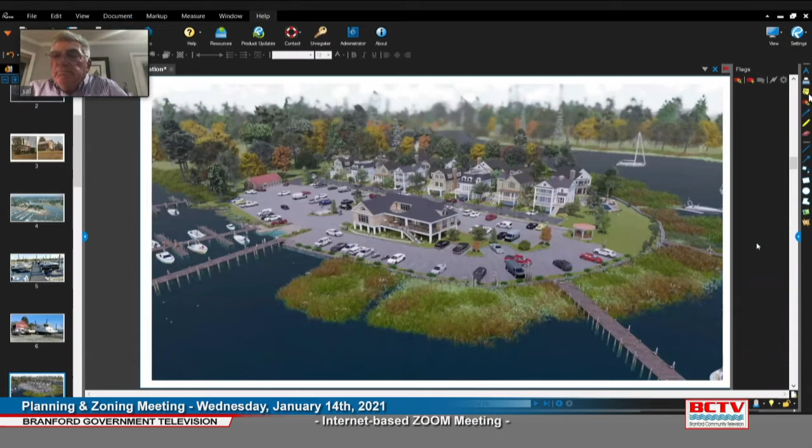And this is what we hope to do, the next phase of the project: Marina Village. There are 3 existing homes on the property now that, again, are in pretty rough shape. We hope to remove those homes and build 12 additional homes, plus that larger building you see in the middle of the parking lot.

The Sullivan Group did the architecture, and the idea is, we asked Ray Sullivan to create what might feel like a very small maritime, marine-oriented street that you might find down in Cape May or in Nantucket.

Water-oriented designs, fairly small footprints. Next slide, Todd. Just another look at what the elevations would be.

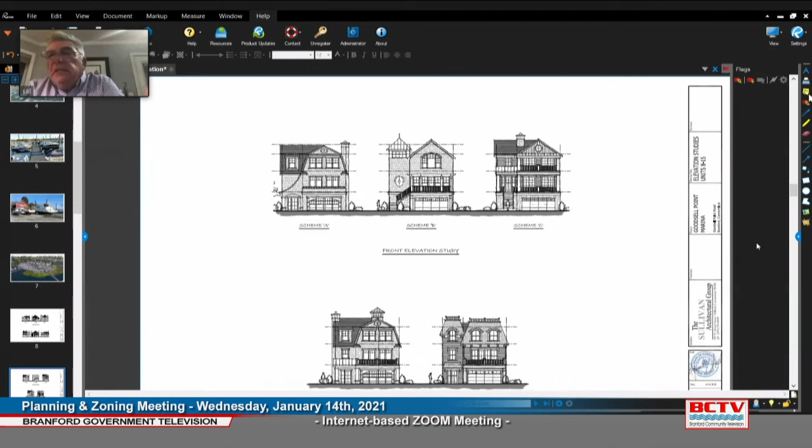It's a combination of 6 or 7 house styles and 3 or 4 different floor plans. Our hope is that people would be able to pick a certain house style they're after and pick a floor plan that suits them.

Landscaping would include 2 rows of houses, with a real pretty curved walkway running through the middle of the 2 rows. That'll be accented with gardens and copper gas lanterns to give that real little nautical village within a village feel.

We believe that the project will have 4 important considerations for the town. Perhaps most important is that we're going to completely revive what you might consider a blighted site at this point. We're also going to bring city sewers the entire length of Goodsell Point Road.

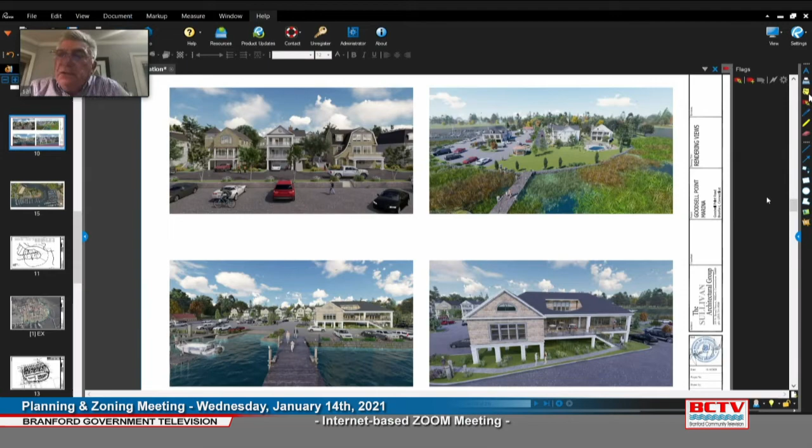And finally, when we get into our site plan, and I think Mr. Ritchie will be talking about this, we're going to create some public access areas, some passive recreation areas, and additional access to the Branford River and Long Island Sound. So with that, I will turn my part over to Todd Ritchie, our project engineer.

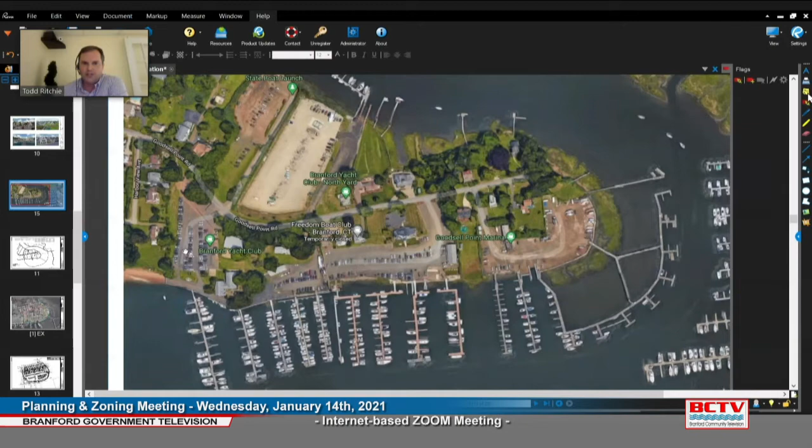You have the North Yard here, and you have the state boat launch in this area. And you have, I think, 4 single-family residences on the north side of Goodsell Point Road, and as Sal mentioned, there's 3 within the PDD area of those sites.

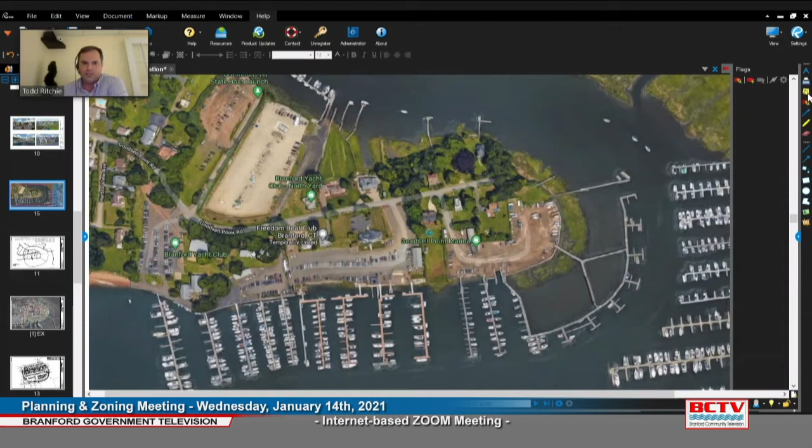Going to the next slide, so we submitted the proposed PDD zone, this outline here, this thick dashed line.

It consists of 6 properties owned by Goodsell Point LLC. There's 2 properties associated with the marina, and then there's 3 single-family residential parcels, which is here, here, and here. And then there's 1 remnant parcel that's here, kind of encapsulated in the use of this single-family parcel.

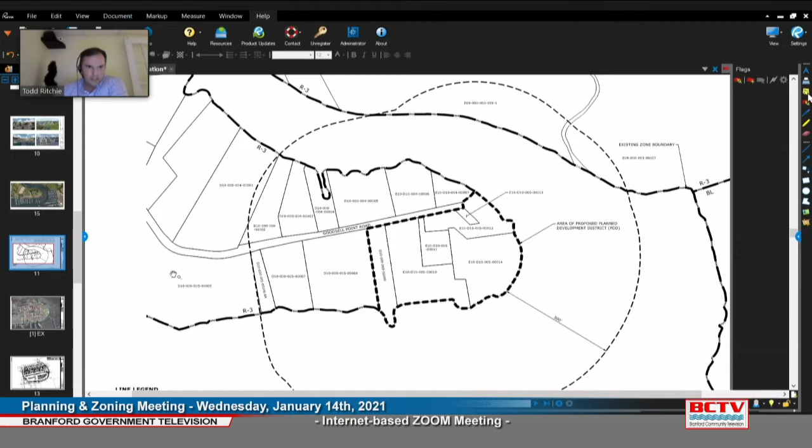The existing condition survey and mapping was prepared by Criscuolo Engineering. The total area of the parcels, as Marjorie had mentioned, all 6 together is 4.11 acres. The tidal wetlands were field identified by Megan Raymond of our office.

The existing structures include the 3 single-family homes, marina service building, platforms, fixed and floating docks, and traveling boat lift support structure. That's this down here.

Ground covers currently consist of grass, pavement, gravel, and trees scattered throughout the residential parcels. Existing utilities serving the site consist of overhead electrical wires and underground lines in the right of way, which are then under the site. Water and gas are public supply, and sewage, as Sal mentioned, is currently disposed of on site through individual septic systems on each of the lots.

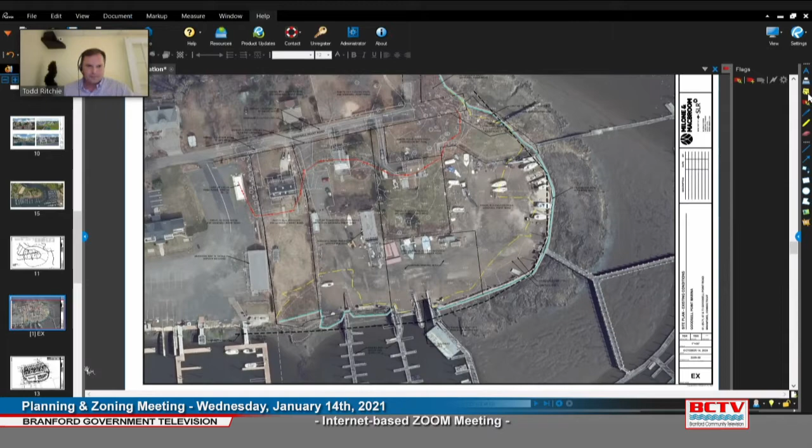Units 8 through 15 are located within the 100-year flood zone. The first floors are elevated above the flood elevation, and the lower level will be used for garage, storage, and recreational areas that are not habitable.

Units 1 through 7 are located along Goodsell Point Road, and they have driveway accesses directly from Goodsell Point Road, and are out of the flood zone.

As far as utilities go, let me just scroll down. As Sal mentioned, and I had also stated, we currently have water, gas, and sewer has been approved.

The conceptual layout for the sewer is that on this town parcel, there would be a pump station, and the main sewer line would run to that pump station with a force main back in the opposite direction to the gravity manhole at the end of Goodsell Point Road.

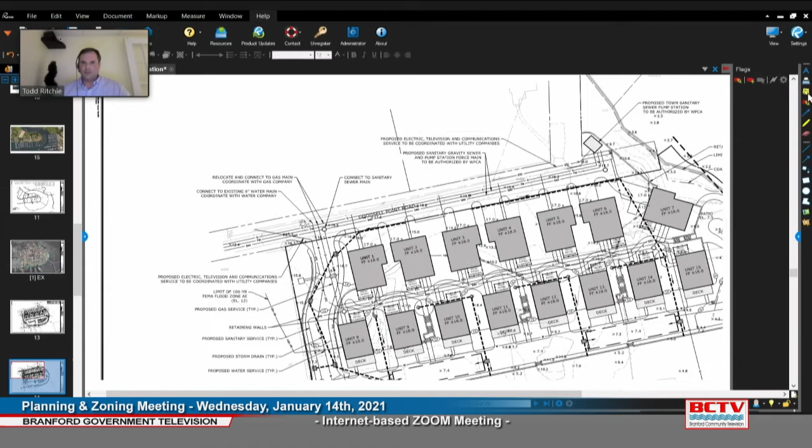It would serve the site. Some areas would accomplish that by gravity sewer, but some of the lower portions, such as the amenities building and the service building, would need individual grinder pump units to pump up to the gravity sewer.

All of these units would be served by public water, gas, and underground electric lines distributed throughout the site.

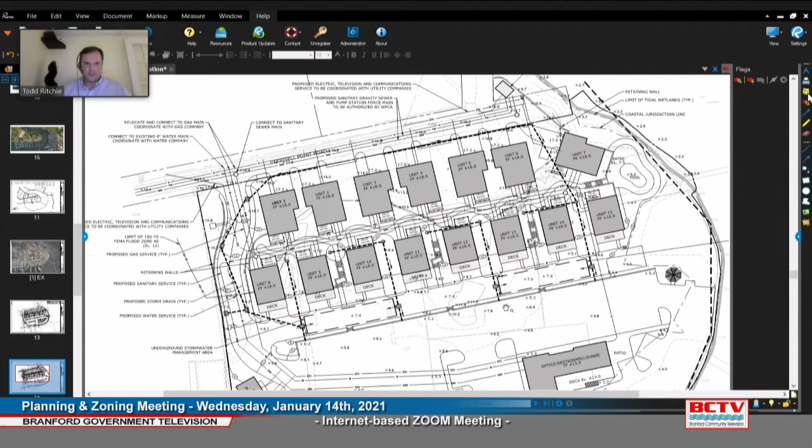At this point, I'm going to hand it off to Dave Sullivan to speak about traffic.

Dave, can you hear us? Can you hear me now? Yes. All right, fantastic. Good evening. My name is Dave Sullivan. I'm with SLR. The first time I've had to say that.

Formerly Milone & MacBroom. I manage our traffic and transportation planning group. We conducted a traffic study, and we also received comments from John Hefferly, and have provided not only the traffic study but a response to his comments. I'll go through both jointly in this presentation, try to keep it relatively quick, and then respond to any questions you may have.

The scope of our study, in blue, is our initial study, which is a traditional traffic study: review existing conditions, estimate future conditions, determine what is going to change and the impact of that change. In this case, it's 15 additional homes; everything else are existing uses. Then we make recommendations.

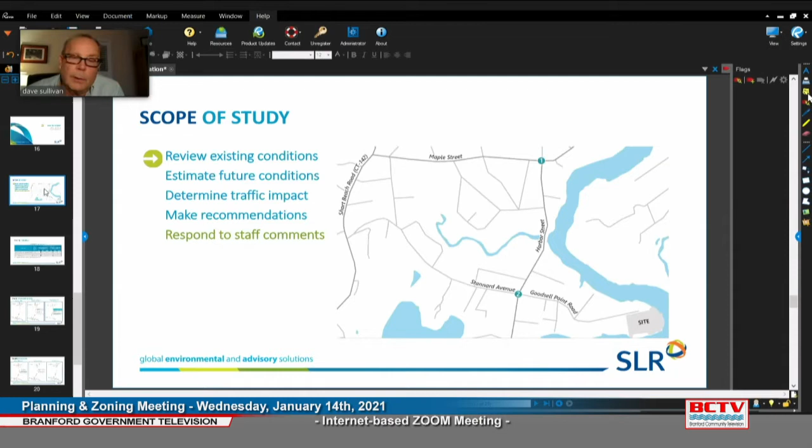In addition, in green, we responded to some comments from John Hefferly, and I'll integrate my responses into this presentation as we go along and let you know what those were.

The first thing here is the traffic being generated. Up top first is the single-family homes. There's 15 single-family homes; while they're clustered, they are 3-bedrooms, so we looked at them as single-family homes. We'll be generating 12 morning peak hour trips and 16 afternoon peak hour trips, not a tremendous amount of traffic, based on Institute of Transportation Engineers statistics.

In green at the bottom of that table, one comment from your town engineer was that although the marina is there and is an existing use, it wasn't very active, and rightfully so, as Sal showed you in some of those pictures. So we did a supplemental analysis adding in projections of what the marina would generate. In green, you'll see what the Institute of Transportation Engineers would estimate for a 155-slip marina during the morning and afternoon peak hours. I'll get more into how that played out in the analysis as we go forward.

One of the things I've been in front of you guys quite a bit lately is the COVID adjustments we have been having to make with traffic counts we take. Obviously, traffic patterns are different as we go through this pandemic, and we have been making efforts to adjust to what pre- or post-COVID conditions would be. Sometimes we have an easier time with it, depending on the availability of other data. One comment from your engineer was that in our report, we talk about doing counts and then adjustments, but we didn't show them step by step, so I'm not going to go through all of these numbers, but I would like to walk through the steps of our adjustment. This is all part of the follow-up letter we recently submitted.

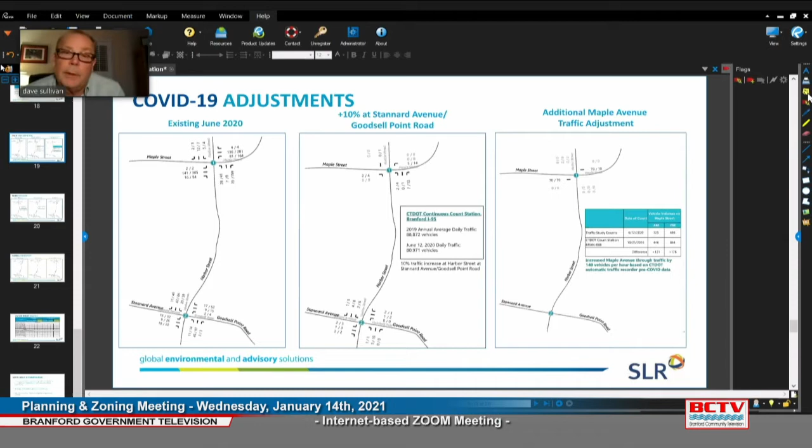Next slide, please. So when we made those adjustments, our existing counts became our adjusted 2020 count, and we reported on those adjusted 2020 counts without showing those interim steps in our report. That's essentially what one of the comments was about. Ultimately, we take those 2020 counts, increase them for normal growth rates, and bring them up to 2022 levels for our design year. We also added in the traffic for the Mariners Landing project, which gave us the combined traffic volumes.

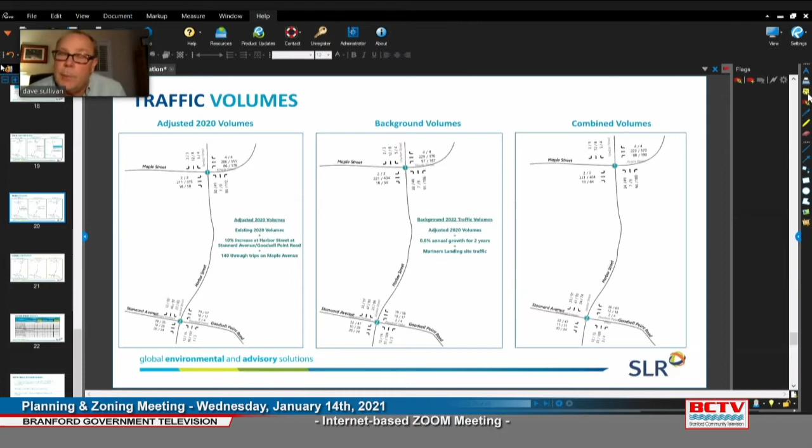Next slide, please. This again is the combined volumes, which the impact was based on in our traffic report. In green in the middle, you'll see we added the marina traffic from the dormant marina that I talked about in the earlier slide. We took that traffic and added it onto the build traffic volumes, coming up with a new, higher traffic build scenario for 2022.

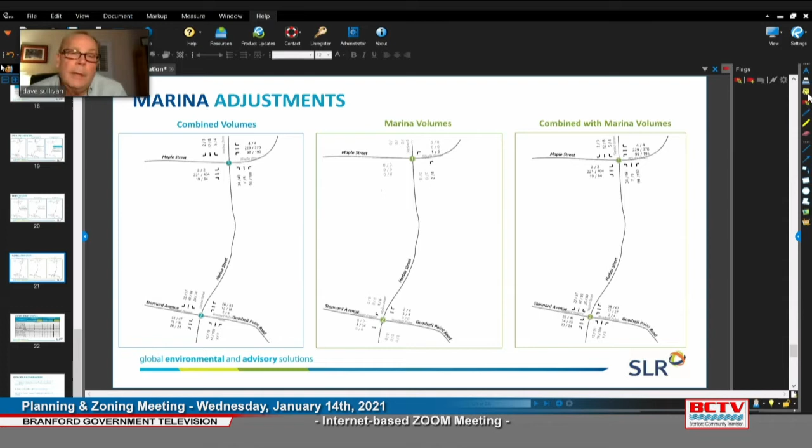Next slide, please. So what does that all mean? Here's our analysis. The first two columns are what we reported in our original traffic study, showing that we're not impacting traffic volumes in either peak hour at either of the analysis intersections. The green column shows the results after we added the additional traffic in, accounting for the previously vacant marina. Again, we see there's no change in the results by adding the marina traffic on.

We'll get to the last slide here. Our conclusions and recommendations are, essentially: one, that the intersections will operate acceptably with generally good levels of service and there'll be no impact. These results are with and without the additional marina traffic volume adjustments, and no level of service change is associated with the site-generated traffic.

Lastly, one more comment presented to us from Mr. Hefferly was that he would like us to put fog lines on Stannard Avenue between Short Beach Road and Maple Avenue, and Sal has agreed to do that. So if you have any questions, I'll leave it there. Thank you.

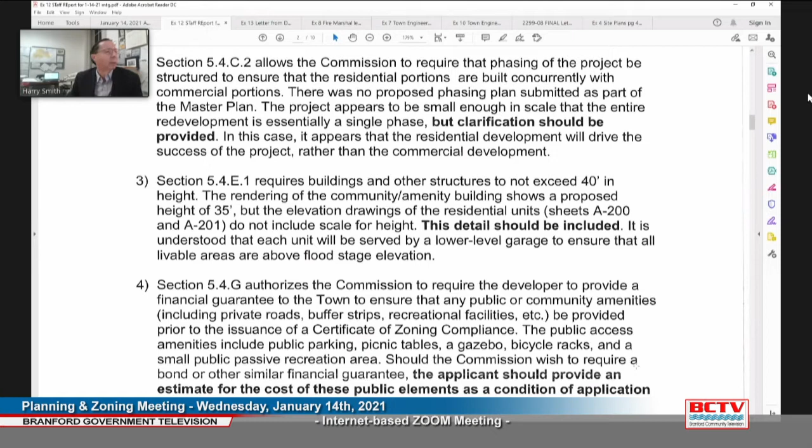Jumping ahead here to the next comment, number 4, to a possible approval and looking at a provision of a financial guarantee to ensure completion of public or community amenities. Mr. Guskowski is looking for an estimate of the cost as a condition. I'm jumping ahead to 9 10.

Mandatory referrals were made. As was mentioned, there were some comments from the town engineer. The fire marshal is generally amenable to the proposal as stated, and the police department had no comments. We did also receive an email, subsequent to the writing of the staff report, from the East Shore Health District, and they said that with the potential availability of the public sewers, they had no concern.

The next section just lists the four required findings and some commentary on each. And on B here, there's nothing stated at this point about actual maintenance of the recreation facilities, open space, or what amenities have been proposed yet. Could be.

Let's see, streets and drives. We've heard traffic. Mr. Guskowski's comment was echoed by the town engineer. That has already been covered by Mr. Sullivan, so that information was just provided today to us and has not yet been forwarded to the town engineer. So I think, jumping ahead a little, I would recommend the Commission continue the public hearing so we can hear back from the town engineer about that and have an ongoing dialogue if necessary.

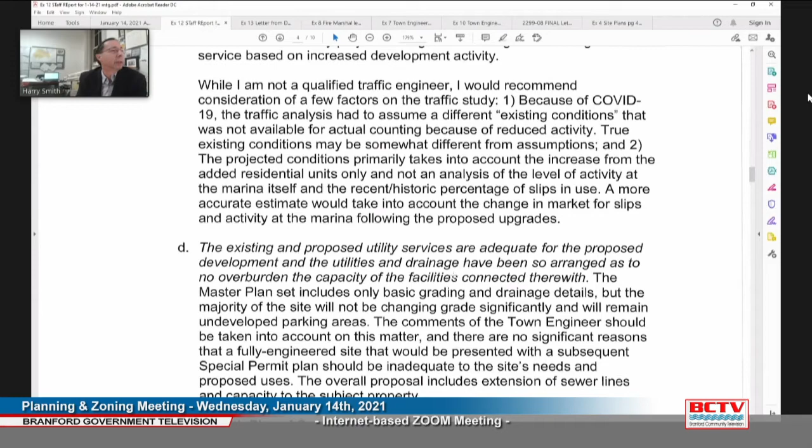Regarding existing and proposed utility services, there are really no substantive comments here outside of those by the town engineer. A lot of those details will be picked up at the site plan level of review also.

Conformance with the Plan of Conservation and Development. Mr. Guskowski generally found that the areas noted by the applicant, maintaining existing coastal access and supporting economic development, were well taken. He was a little more skeptical about addressing housing choice and opportunities, which brings up the question of affordable housing, raised in the last several PDD applications. Note that at this point, I understand there's no proposal for any of these units to be labeled as affordable, and there's nothing in the documentation proposing any kind of fee in lieu. It's also my understanding.

General design comments, I'll note that, as was mentioned, the northern row of units. I'll move over to the plan for a second. Bear with me.

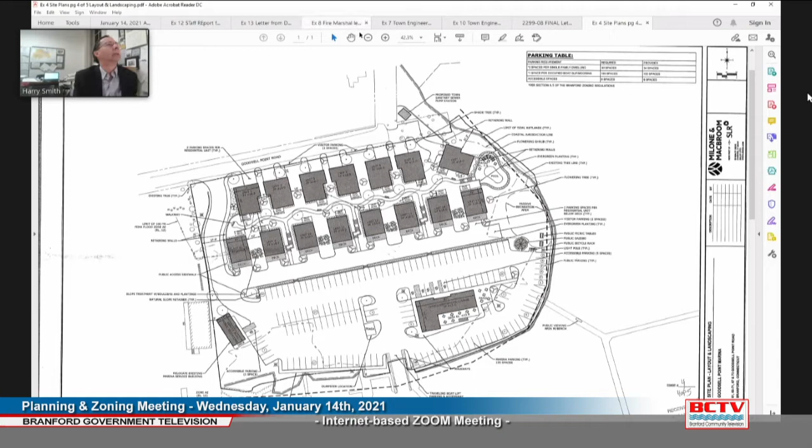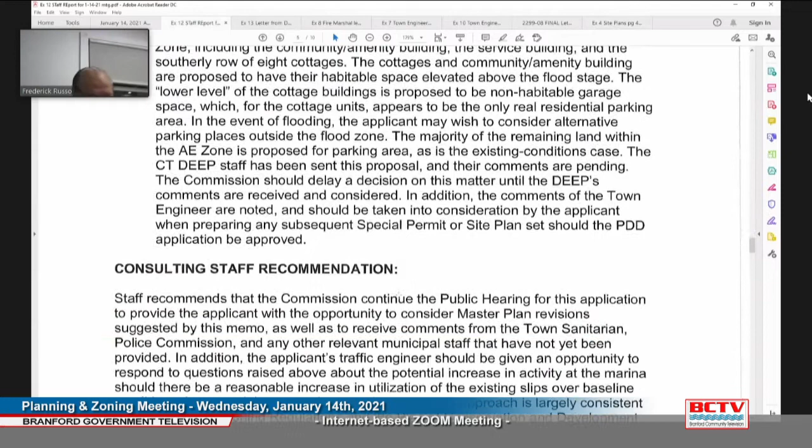Generally, outside of those comments, the approach has been found to be largely consistent with the regulations of Plan of Conservation Development. I will mention that I did look quickly at the density being proposed, and based on the square footage of lot area dedicated to residential use in the plans, which was 78,950 square feet, and the 15 units, that is much higher, about 3 times what would be allowed in the R3 zone.

Not even subtracting out for what it would take to subdivide this area and create lots, which would involve creating a road and maximizing it out, I would think. Well, maybe you could do 5 — 5 would be the number you could get for 78,950. The lot area you would need for the 15 units would be well over 200,000 square feet. I'll just note that and stop there.

Any questions? Chuck Anders, Chair: Thank you, Harry. At this time, let's open up for questions or comments from commission members and staff. Are there members of the commission that have questions or comments?

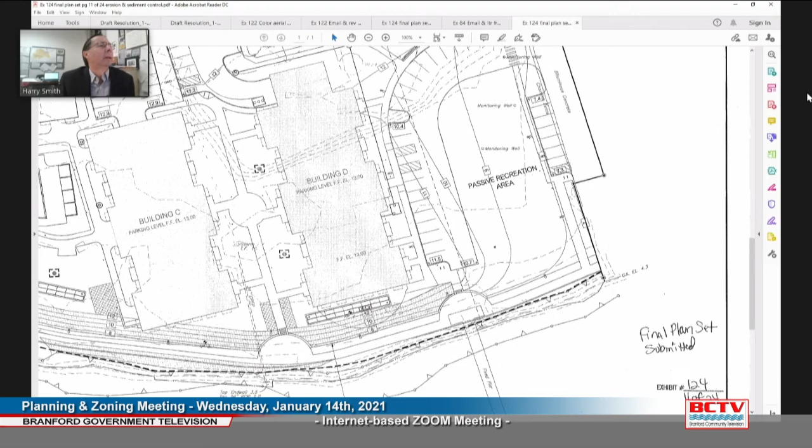Number 6 would require modification or new easements for the following purposes: public access for all those provisions in the plan. There is an area on, let me move over to the plan here quickly and show you, right here, that is not defined. Let me go back.

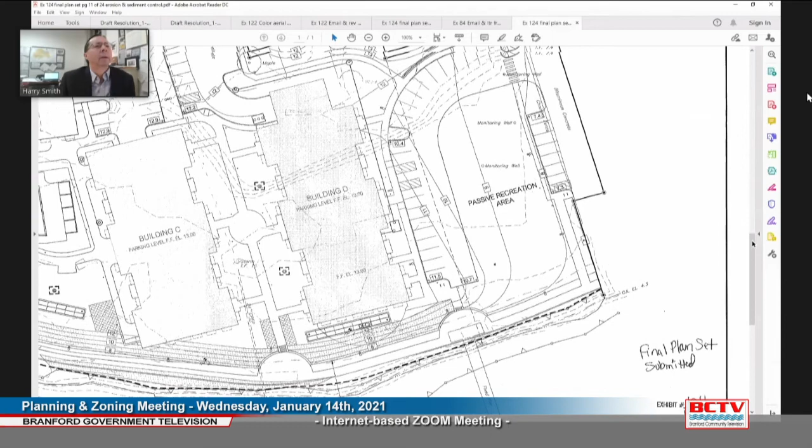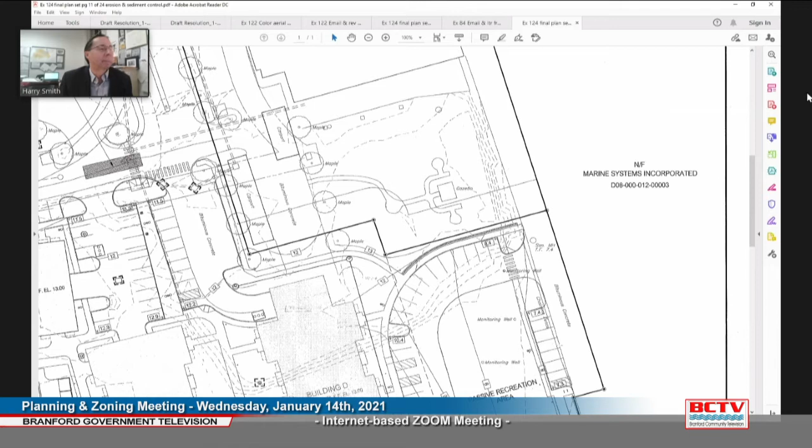So to go up here a bit, it's unclear on the subdivision plan that this strip here, which is basically the easement to Marine Systems Incorporated for access to Nellie Greens and the marina, Ross property currently owned by Ziegler, I believe, current owner of the whole PDD for Anchor Reef, that will actually be subject to a public access easement in favor of the public to the town for access down here to this public parking and access to the Riverwalk. Be cleared up.

Again, a lot of these are details. There's a requirement in the regs to have public improvements as part of PDD maintained by property owners of the PDD. So that requirement is right in here in Roman numeral I, number 3.

And then we had talked, at least I had talked a little bit about allowing a friends of group, possibly add additional improvements to public easement areas, public open space along the river. Allow for that, subject to the approval of the town, with the proviso that these features wouldn't negatively impact views and that the property owners would not be responsible for additional features.

We need an easement for stormwater drainage pipes that currently run to the property. There's a 24-inch, 8-inch, and some other elements of the existing drainage just flows simply through this site. We don't really have rights to drain from the town side.

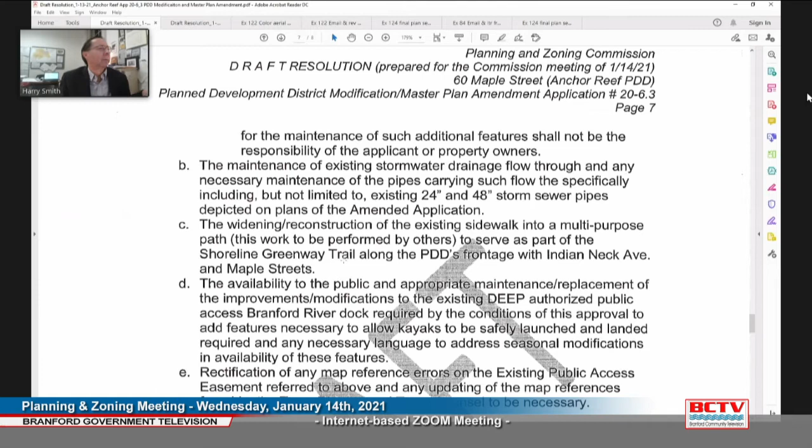Has to do with the easement along Indian Neck and Maple Streets, widening that sidewalk out for possible multi-purpose path, to be done by others, part of the Shoreline Greenway Trail.

This is from the DEEP. It was a recommendation that they modify the dock to allow and put some equipment on it that would allow kayaks to land and launch. So this would require that be done, and any language that would be needed to address seasonal availability of that.

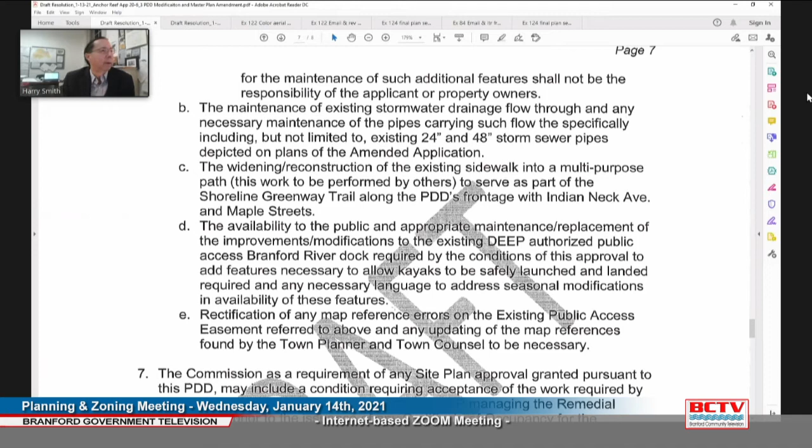Moving down to, this would be a condition that would require acceptance of the work required by the remedial action plan, the environmental cleanup by the DEP. And I should add in the filing of the environmental land use restriction into this, which I did not do, and that both would all need to be done before any COs are issued for the development. And this again, until the cleanup's done.

Before allow site plan approval to have a condition that before any construction activities, there would be a little more beefed up tree protection plan. There's something already in the plans, it takes it out to the drip line. I'd like to check on that with some of the people who are more involved with trees, see if that needs to be expanded at all.

We had talked about, at least I had talked about, requiring notification of new residents that there were public access rights to portions of the development, and that they would get a copy of the public access plan. I think the applicant agreed to that in the public hearing process.

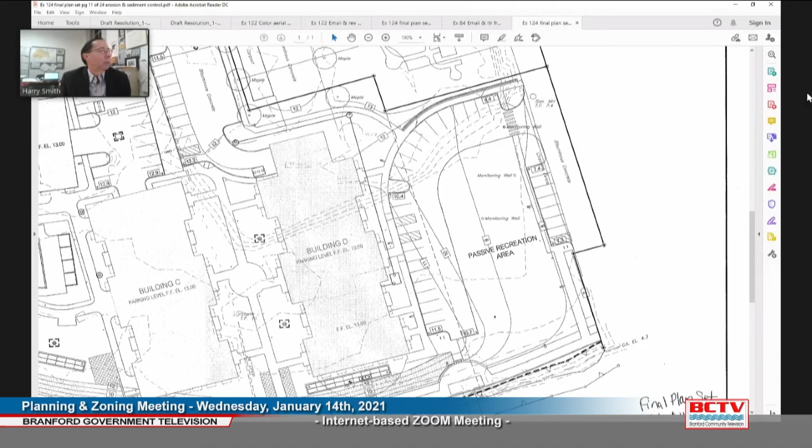One thing I was hoping to include was, first of all, that this public access path would be built as part of, they break it into phases, this would be done before any CO is issued. That if it's broken into phases, that this be part of the first phase.

Also, during later phases of construction, that public access area should be open as much as possible, consistent with safety. That determination would be proposed by the applicant and decided by the building official. It's possible that even when they're building Building D, they could leave open access here and some portion of this area, possibly even access to the public dock.

That's sort of an open question. I'm sensitive to the fact that we've got comments from DEP about how long it took for a pathway to be constructed, because the other two buildings never got built, and that's where the requirement was. So I wanted to move that as far up in the process as possible. Should something similar happen here, that won't happen. Wanted to note that.

I'm proposing in the site plan, if you read it through, a number of financial guarantees for sediment and erosion control and public access amenities, which would be covered by a bond under the PDD section of the zoning regs. I think that's pretty much it in terms of questions. Everything else pretty much follows through with what I already mentioned.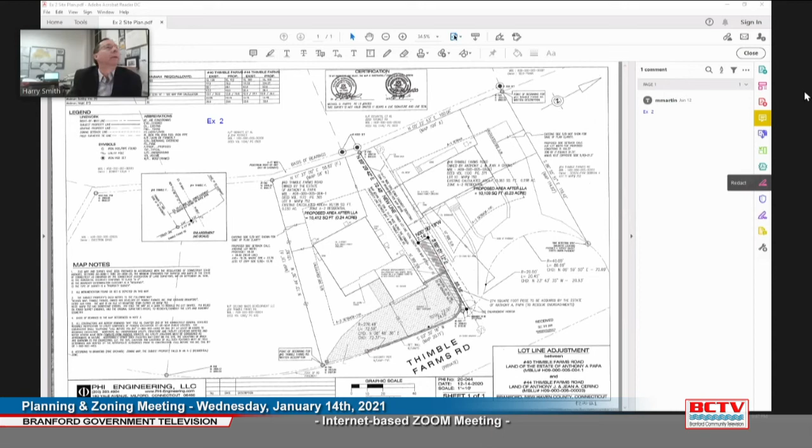John Lust, second by Joe. All in favor? John Lust in favor. Joe Vayuso? Let me find him. Okay, you should be able to unmute Joe. Yes, Joe Vayuso in favor. Thank you, Harry, welcome. Joe Chadwick in favor. Marcy in favor. And Chair is also in favor. So thank you, Attorney Wallman.

This brings us to item number 2 of new business, a coastal site plan demo at 243 Linden Avenue, Lisa J. Latanza, applicant and owner. I understand that just came in, Harry, so we're not ready for that one. Harry Smith, Town Planner, confirms that's correct. Okay, so we can table that.

Now, do we need to add to the agenda the new application at 2325 Linden Avenue? You probably should if you want to set the public hearing date. Just note that it's section 6.8 special exception application, 2325 Linden Avenue, Nicole Girosa, trustee, applicant and owner.

Is there a motion to add that new application to the agenda as new business? Chadwick, Joe Vayuso, sorry, Joe, you got it. Okay, we'll give the motion to Joe Vayuso and the second to Joe Chadwick.

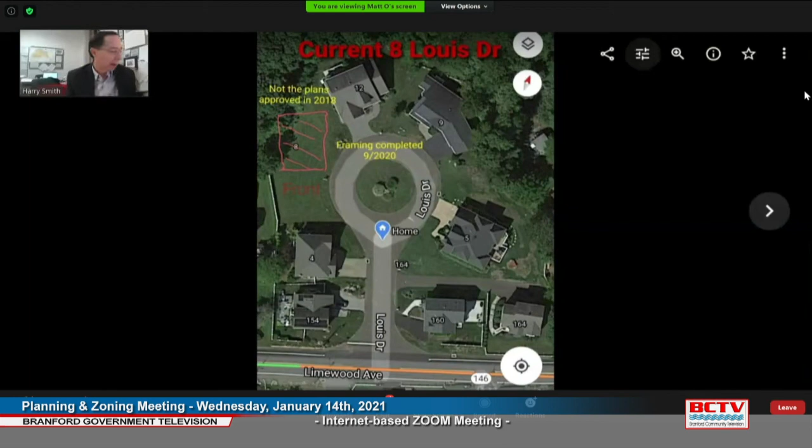Okay, Harry, next item on the agenda is planner's report, what do you have, anything else for us? I do not, other than to announce that we have hired a new assistant town planner, a gentleman named Evan Brining, I believe, and he is from New York State, just over the line from Greenwich, and will be starting Monday the 25th. Hopefully we'll be introducing him at the next meeting of the commission on the 28th. Okay, great, excellent, anything else? That's all. Okay, great, anyone else have anything else?

Someone want to make a motion to adjourn? Joe Vayuso moves to adjourn. Okay, motion by Joe, is there a second? Chadwick seconds. Okay, John, are you in favor of adjourning? John Lust in favor. Joe Vayuso? Joe Vayuso in favor. Joe Chadwick? Joe Chadwick, absolutely. Marcy? Aye. I'm also in favor. So good night, everyone. Good night, good night. Hey. Night.